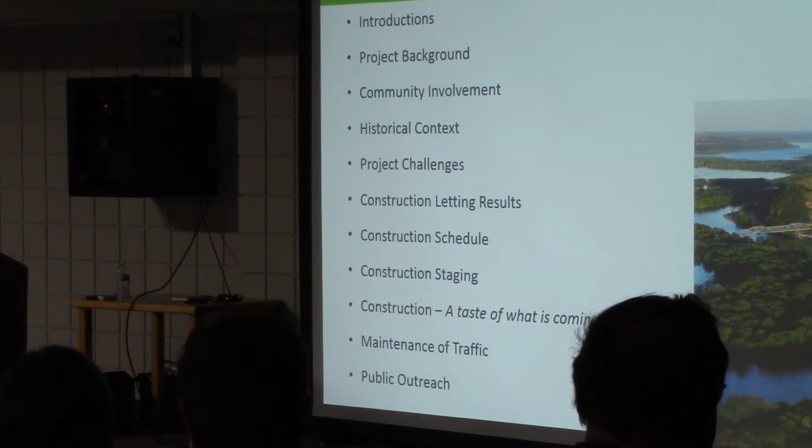Talk a little bit about public outreach. And so we'll start with introductions then.

My name is Terry Ward with MNDOT, the Minnesota Department of Transportation. On behalf of MNDOT District 6, I'm really appreciative of you taking time to come out and listen to what we have to say. There's been about 7 years plus of work on this project, and our challenge in the construction phase is to honor that work that's all been done.

A lot of you I recognize have attended some public meetings and you're here again, and we want to honor those commitments and those discussions and public input that we've gotten already. So my office, cell phone, and email, if you want to write that down, or it's on the boards, we have business cards, feel free to take that information. Basically for the project, in terms of the owner's side, I'm the first point of contact. Go ahead and call anytime if you have questions or something that's bothering you, or you want to know what's going on, or what's coming down the line, just go ahead and call me.

I'm also pleased to announce another speaker tonight from Zenith Tech, the construction manager, Adam Heinrichs from Zenith Tech. Adam is their construction manager, project manager. They're the winning contractor, and he's here tonight to give a little overview of their schedule, Zenith Tech and their team, and where they're from. So pleased to have Zenith Tech and excited to team up with them and build this project. Those are the speakers that we're going to have tonight.

Some other partners: the Federal Highway Administration. I don't believe there's anybody here from the FHWA - I don't see anybody, but they're a major player in our project with federal funding.

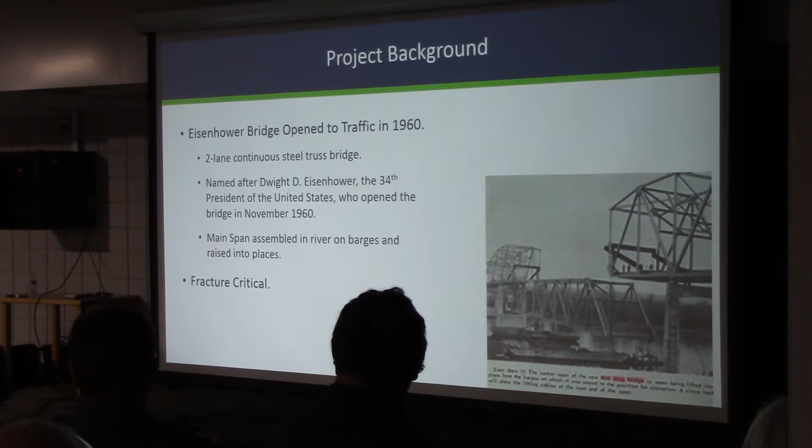We have some cool video footage of that event back in the 60s, of him being in town and opening the bridge. The main span was assembled at that time in the river on barges and raised into place. That's an old news clipping of the bridge being built—you can see the main span out in the river on barges, actually lifted up into place. Just some cool history. And that bridge is fracture critical.

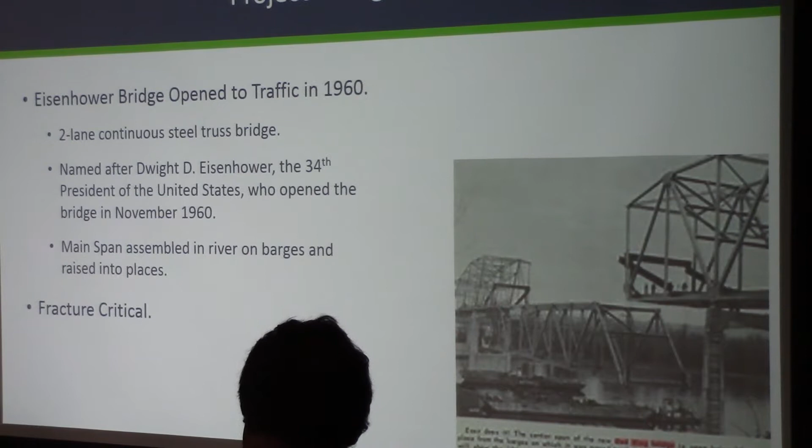What does that mean? Well, like the 35W bridge in the Twin Cities that collapsed, which was fracture critical, the existing Eisenhower Bridge is also fracture critical. One of the reasons we're doing this project is building a new bridge and actually removing that one. So just a little flavor of the history.

Purpose and need from the environmental study: basically, the primary need for this project is to provide a structurally sound crossing of the Mississippi River on Highway 63, and also to improve mobility in Red Wing in terms of traffic flow to the community. I'm not going to read the whole thing, but that's the primary purpose and need of the project, what we're trying to accomplish.

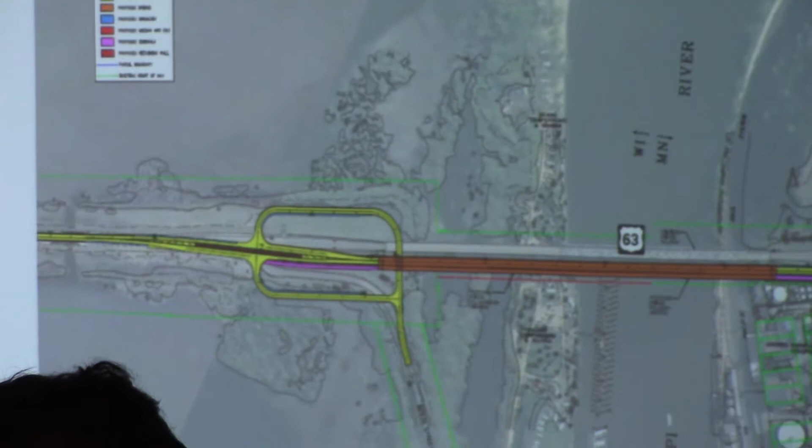So our project layout that a lot of people have been looking at—I'm just going to point out a couple things for discussion purposes. On the Wisconsin side, this intersection is what we call a jug handle. It's basically right turn movements in and right turn movements out with a solid median across there, so no left turn movements—exactly the same as what we built in Winona on the Winona Bridge project. Much safer because it removes those left turn movements in traffic. So if I talk about jug handle, I'm talking about this guy here.

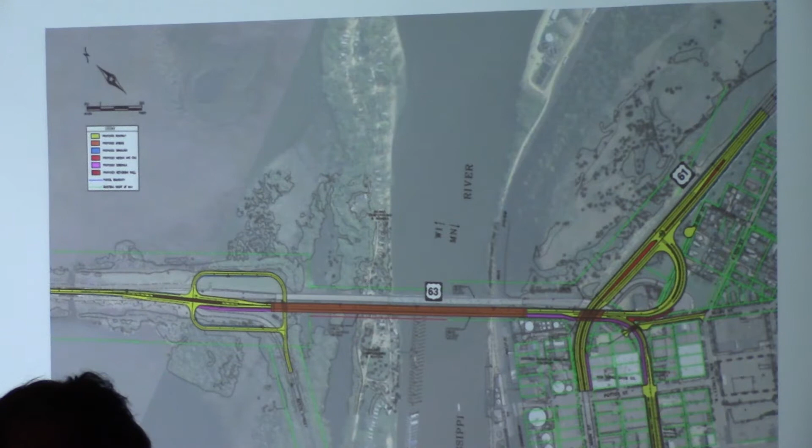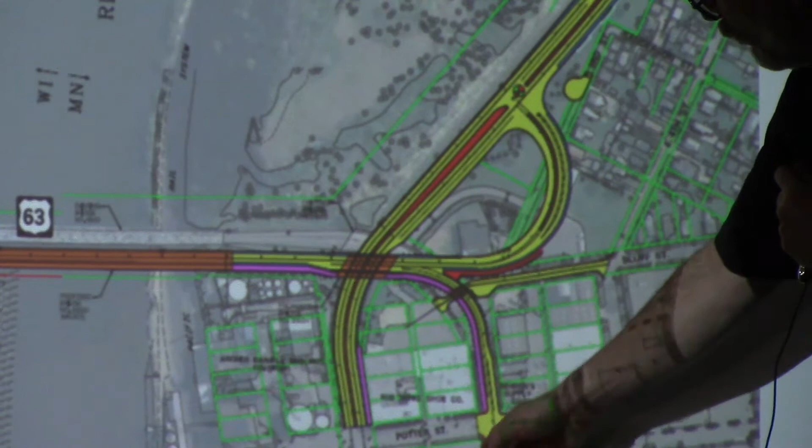Over on the Red Wing side, this is what we call a button hook. The existing slip ramp is two-directional today—you can go both directions to get up onto the existing bridge. When we're all said and done, this slip ramp is a one-way movement into town. It becomes two-directional down here between Plum and Potter, but this is a one-way movement into town.

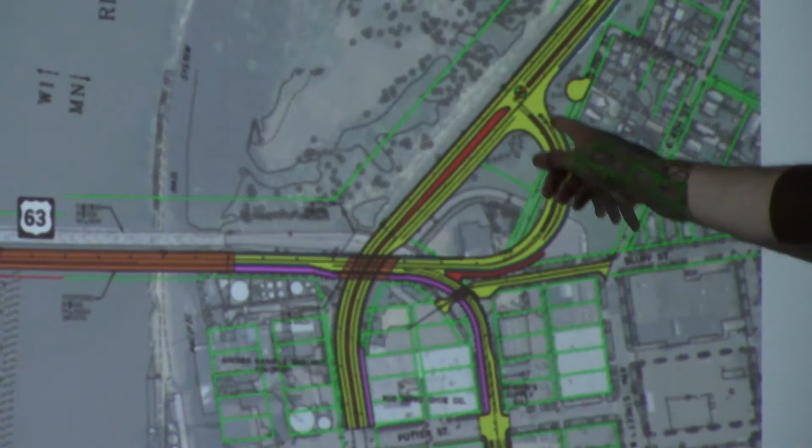Another option is to take this button hook to a new signalized intersection on 61. This piece is two-directional. So if you're in Red Wing proper and you want to go to Wisconsin, you've got to go out onto Highway 61 and go around the button hook and across. There's no longer that two-directional movement on the slip ramp—one direction in, and you have an option to take the button hook. Again, if you're in Red Wing and want to go to Wisconsin, you go through here, through a new signal, through the button hook, and out.

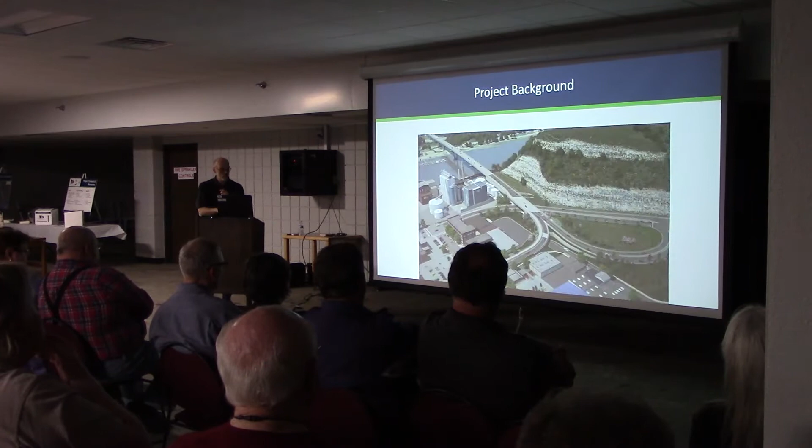Another rendering on the Red Wing side shows the button hook, the slip ramp, and the bridge over Highway 61 here. There's another bridge over that access, if you will, to the back side of Red Wing Shoes—that's another structure we'll be building.

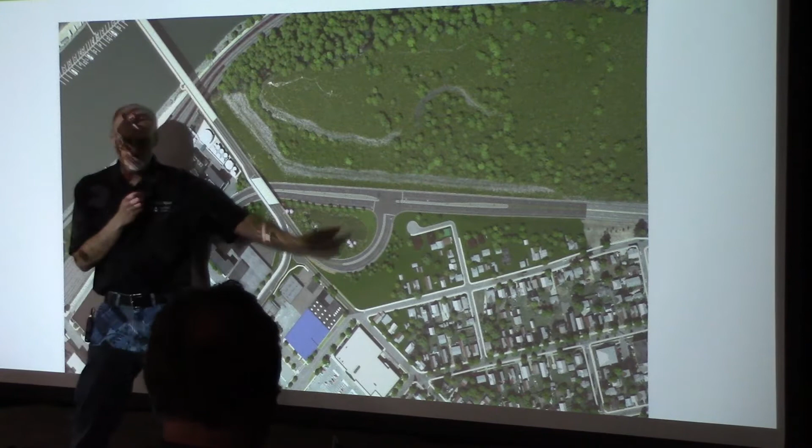And finally, one last aerial of that same area. I wanted to show this one just to give you a better feel for the cul-de-sac on 3rd Street, which we'll be cutting off as we build this button hook around. It gives you a better feel for some of the final conditions over there.

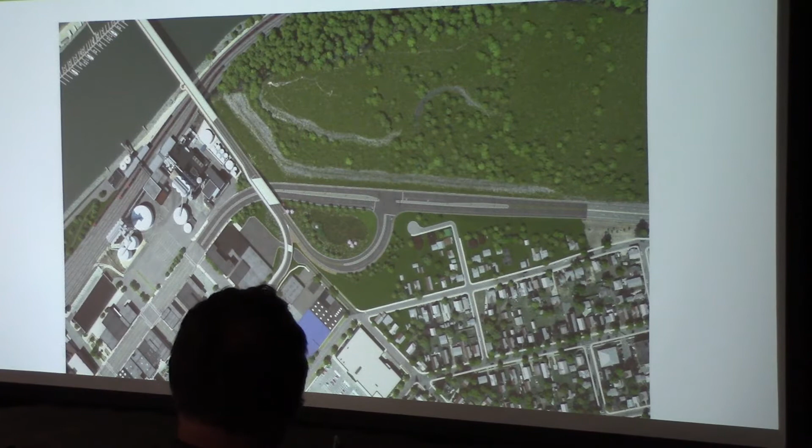Terry had a question: is the new bridge going to be a little bit longer, or are you going to fill in some of the swamp underneath the existing bridge? The question was whether the new bridge will be relatively the same as the existing one, and whether we'd fill in some wetland areas to shorten it or drive under there. No, we're not going to do that. So the new bridge will be relatively the same length as the existing bridge.

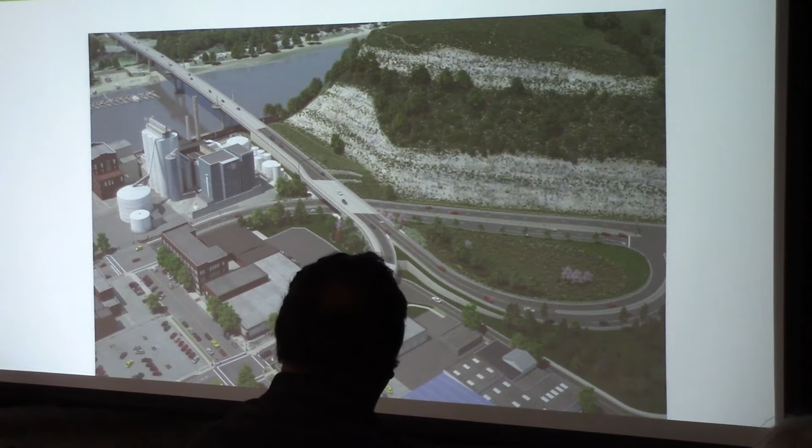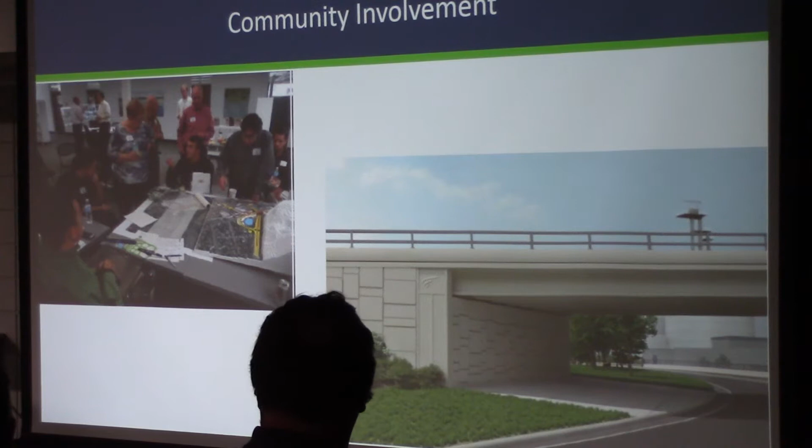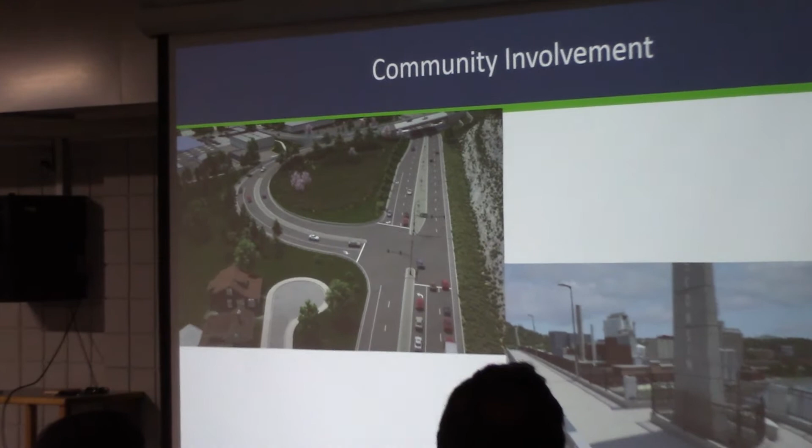What I wanted to show on the bottom right is some little signs of Red Wing in the abutment, the detailing on the abutment wall, the wing wall. In the button hook area, there's some landscaping and planters. And on the bridge itself, we have two overlooks and spires with Minnesota and Wisconsin on them, along with some ornamental railing. So you'll start to see those elements.

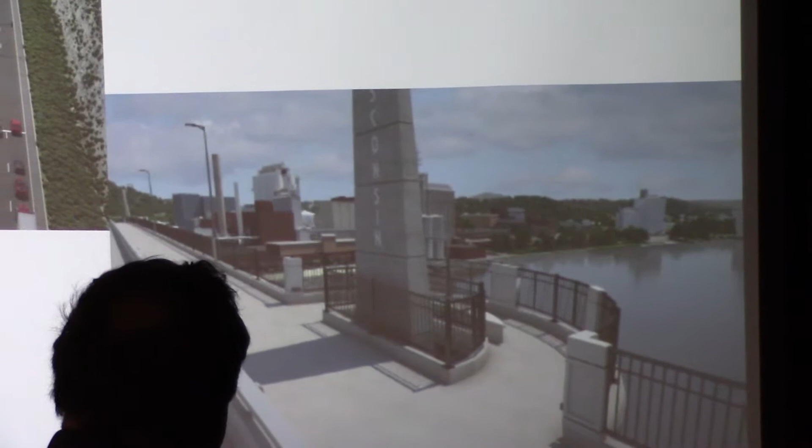A little bit of historical context then. In terms of the setting, we're in a downtown historic district, with specific historic buildings in proximity to our project and construction operations. Barn Bluff is a historic element, and we're well aware of that. The Trunk Highway 63 bridge over 61 is also a historic bridge, a smaller one. So for these historical properties, we're going to have a vibration monitoring plan for all those historical features.

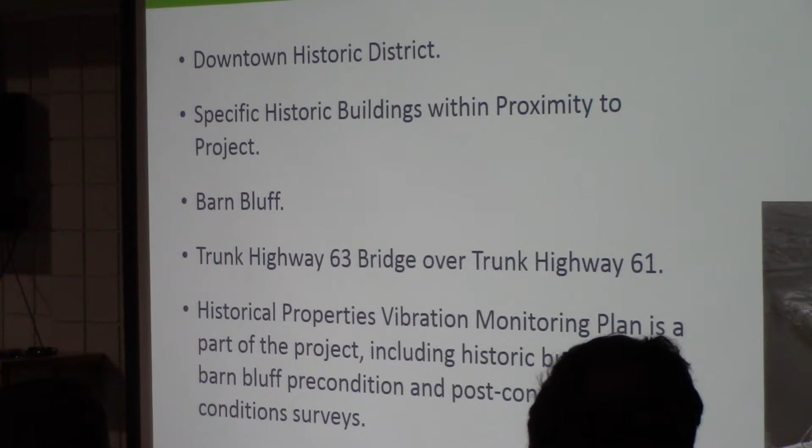We monitor how much vibration the construction activities are creating, with a mindset of protecting those historic resources. We've studied Barn Bluff quite in depth, and we actually have specific vibration limits for any work in its proximity, so that we don't do any undue harm or damage to it, as an example of the work we've done and intend to do.

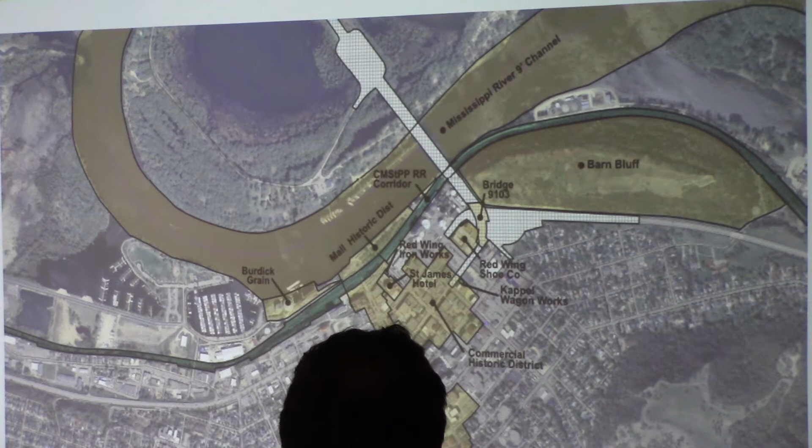So regarding historical context, we're well aware of the community and the views of Barn Bluff. This slide shows the historical buildings and the historical district, and it shows Barn Bluff. Actually, the river channel itself is historic, and the CP Railroad is historic as well - there are some historical aspects to those. So there is quite a history of historic elements and historic properties.

Okay, let's talk about some project challenges then, moving on to another phase here. This is a major, complex infrastructure project, no doubt about it - it's a challenging project to build. Zenith Tech has come to town with a lot of equipment, manpower and horsepower to build this project, and we're excited to be a part of it with them. It's a very narrow project corridor - we're squeezing in between ADM, our friends in back who are here, and Barn Bluff and the existing bridge. That's a real tight, narrow corridor for us to work in.

The peak AM and PM commuting hours across the river are a challenge, and I'll talk a little about maintenance of traffic and how we're going to respond to that. We understand there's a morning peak hour and an afternoon peak hour commute across that river during the week for workers. There are also construction and post-construction traffic pattern changes - I talked about the button hook and the slip ramp and some new traffic changes there, so we're going to try and feature those in our public outreach. We're also working in close proximity to some businesses.

Has the Prairie Island tribe had any input in the planning process?

The question was whether the Prairie Island tribe has had input in the planning process. We've met with them, worked with them, and will continue to talk and work with them for this project. We've reached out to them regarding a groundbreaking that may occur here, and we'll continue to work with them on the project.

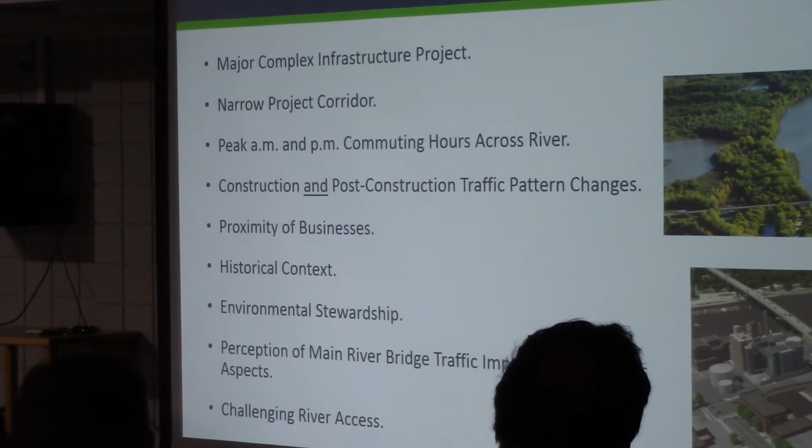Within 660 feet, we can clear trees, but we have to have somebody watching the nest at all times while we're clearing. Fish and Wildlife doesn't want the eagles leaving the eggs for over 2 hours. If the eagles fly away while we're working, we have to stop until they return if they're gone more than 2 hours. We can work within 660 feet though. We have a permit for the tree removal, which we've done, and we're getting a permit for the rest of the job and all other operations — I suspect it'll have those same requirements, and we'll follow them.

Let's talk about the perception of the Main River Bridge traffic impacts and business aspects. In my recent career I've been fortunate — I started working in Dresbach on the bridges there, moved up to Winona where I'm still working on the project, and now up to Red Wing. It's been a great journey for me.

In Winona, one issue was that people on the Wisconsin side thought the project would impact them so much it wasn't worth their time to come shop in Winona. So we had to fight the perception that Winona was open for business and easy to get to. We deployed some techniques there, but that same perception could arise here for the business community in Red Wing — that this major complex project will disrupt their commute to shop in Red Wing. We were mindful of that, and we have techniques that could work here too.

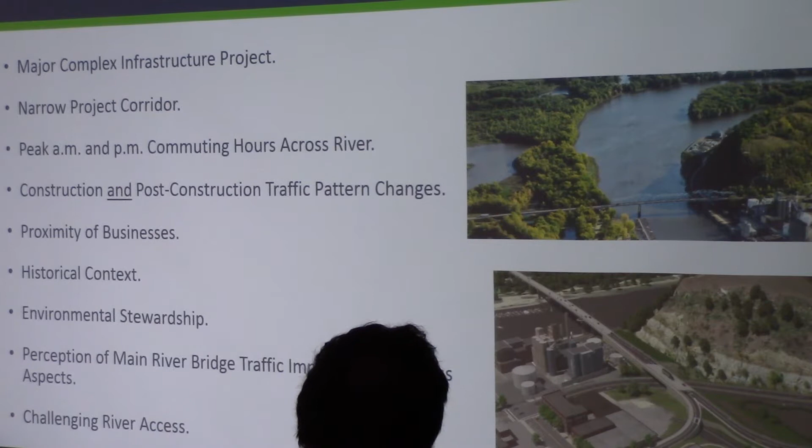There's also the challenge of river access. On the Red Wing side, that tight corridor with the cut to the bluff and the railroad makes it real tough to get to the river. That's just another challenge we have to work with.

Let's talk a little about construction letting results. The letting date was March 8th. We had four bidders — four contracting teams that submitted bids. Zenith Tech, Adam and his company, were the low bidder at $63.4 million. We'd like to give you a bit of background on the Zenith Tech team.

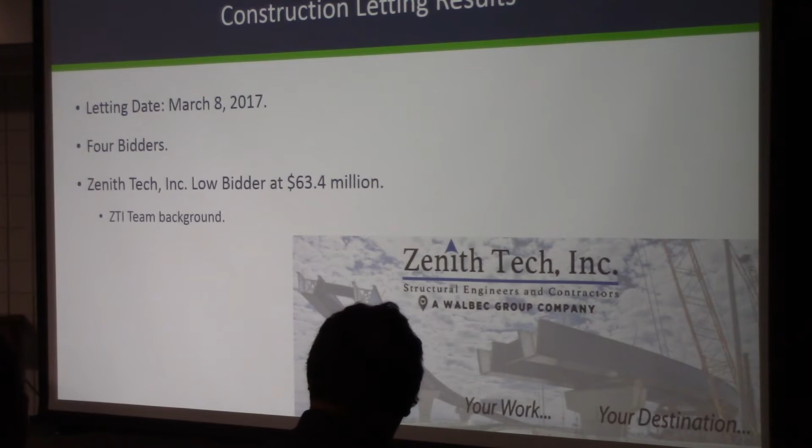I'll start with some company background. We're Zenith Tech, a Walbec Group company. We've been around for over 85 years as a group of companies in the heavy and highway industry, with backgrounds in every aspect of roadway and bridge construction. We're new to MnDOT, so a lot of people may not be familiar with us — we've been bidding projects in Minnesota for about two years. We're working over at Grand Forks and up in the cities, and we're really excited for this opportunity to come down here with our team.

So we're bringing our construction team, foremen, superintendents who have 30-plus years of experience building bridges very similar to these structures. We have a big background building very tight urban interchanges, so we felt this fit our core competency, and we put together a good game plan. We have over 20 subcontractors that will be working with us to complete the other aspects of the work out here, and we're very excited for this opportunity to be working with

MNDOT. Question for Adam? Yeah, thank you.

Okay, let's talk a little bit about construction schedule then. The contract start date — I've had a number of questions. Hey, is Friday the start of construction? Well, not necessarily. The contract start date, when the clock starts ticking on the contract time, is Friday. Adam will talk about their operations and schedule in a little bit. Contract completion date, when all work is to be completed, is August 20th of 2020. That's building the new bridge, all the roadways, everything I've shown you, plus removing the existing bridge.

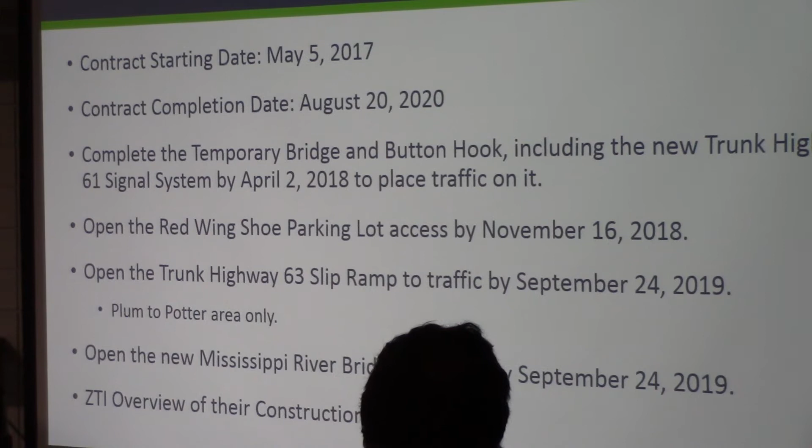Okay, Adam, if you'd like to give a little overview of your schedule. Yeah, Terry gave a great overview of the overall dates in the contract, but I think I'll primarily focus on our work for this year so everyone knows what it will look like. As he said, the contract starts May 5th.

We're still working to get a lot of the environmental permitting in place, vibration monitoring plans in place so that we can protect all of the elements around here correctly. That being said, we're looking to move in on the Wisconsin side and start on the north side of the new river crossing yet this month. So in the next couple of weeks, you'll see activity on that side. We'll clear the trees out, start building our temporary access to actually construct the bridge elements down below, and we'll start working on new fills, because the new fills on that side have settlement periods before we put traffic on them of up to 12 months. So we want to make sure we get on those early and get those in place. That'll primarily be what you see for the next couple months.

We are working to get our vibration monitoring in place on the Minnesota side, which will probably take us to around July before you see any major activity on that side. For the time being, you'll see some utility relocations that are ongoing over there, but in July you'll see some of the old buildings that need to come down starting to be demolished. We'll move in down by ADM and start preparing the area for constructing the new pier that goes along the existing pier down next to the rail yard.

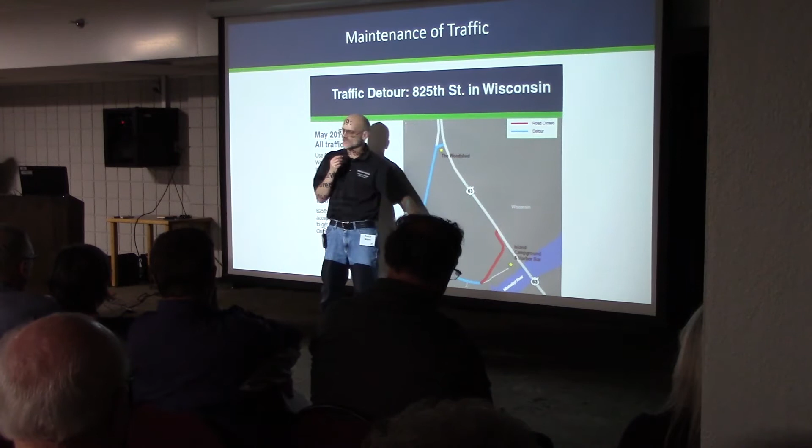Let me go a little ahead and I'll come back. So we're talking about the rerouting, detour if you will, of this 825th Street traffic around this direction. MNDOT guidelines, which is similar to WisDOT, say this is not trunk highway traffic, it's a local traffic movement. We're not detouring Highway 63, so we're not required by statute to take over this road as a formal detour and be responsible for restoring that road at the end of the project.

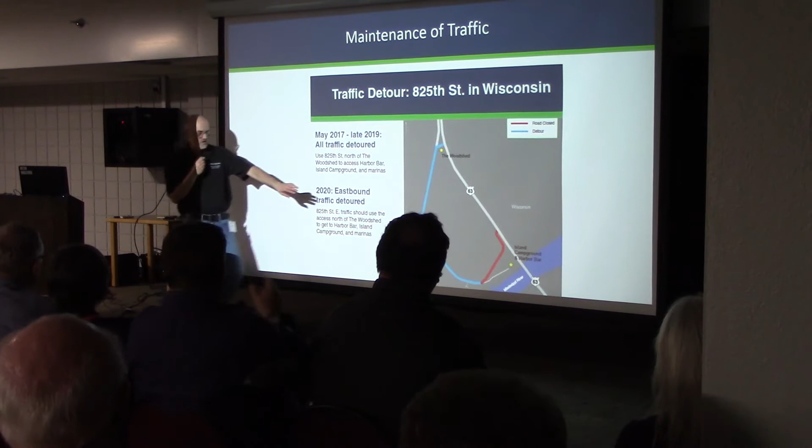So to answer your question, is there money within the project, either from the state of Minnesota or the state of Wisconsin, to pay for any road damage? No, it's not allowed by statute because it's not detour or trunk highway detour traffic, it's local traffic. So again, we won't be taking that over and bringing it into the trunk highway system, and we won't be responsible for any impacts unless the Zenith team declares this as a haul road. Meaning if they want to haul aggregate, base materials, and loads across there, then we get into a haul road situation, which is different. There could potentially be some dollars from either the contractor or the state for haul road maintenance, but only if they declare it and use it as a haul road.

Question: What happens to your project if the road owner sees destruction of the road and puts a very tight weight limit on it? That's up to the road owner.

If the road owner decides to put a weight limit on there, close the road, whatever, that's up to the road owner, not the Department of Transportation or Zenith Tech. Thank you.

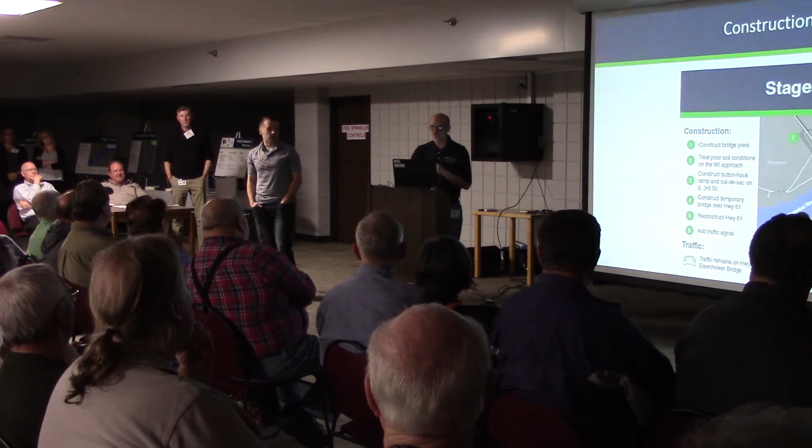The question was about pile driving. The piling that we're going to drive on the project are over here, what we call Piers 3, 4, 5, and 6 and the north abutment. The main river pier, what we call Pier 1, the south abutment, and these other bridges, we're not going to drive piling there - we'll have different foundations. So the pile driving is over in this area, those piers and the north abutment.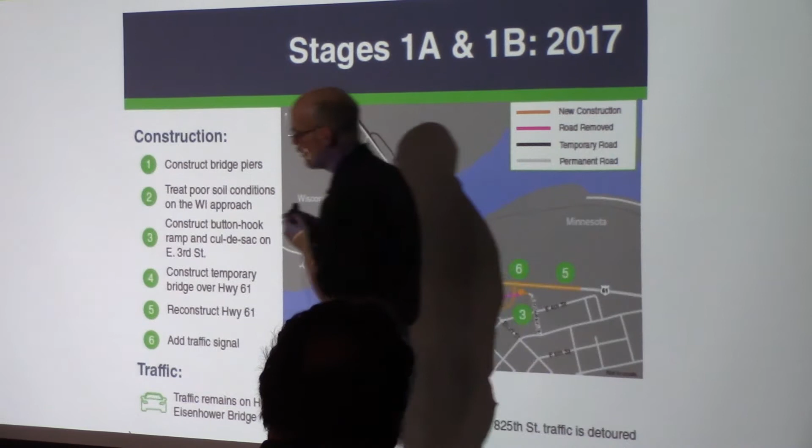We have a couple of specific restrictions. One is noise limits, and two is specific timelines when the Zenith team cannot drive piling and create that noise. That starts Friday afternoons and goes through the weekend, when the businesses, primarily the campground, are open - that season when the campground is open. So Adam talked about coming in, potentially driving some piling. There are time limits in terms of noise creation - can't start before 7, can't go into late evening. You can't do that pile driving operation during those weekend hours.

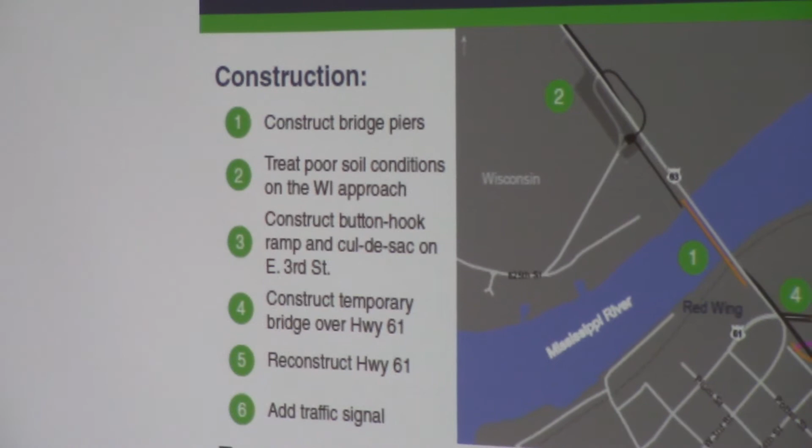All right, thanks Tom. So we'll look at some of the stages from the boards over there. 2017, stage 1A and 1B: number 1 is constructing the main river bridge piers, number 2 is some poor soil conditions on the Wisconsin side - we have to surcharge it, build a big fill, and let that set for roughly a year, so it's going to take approximately a year to build that fill and approximately a year to settle. We also construct a button hook, a temporary bridge over 61, reconstruct a portion of Highway 61, and add a traffic signal. That's stage 1, what we call 1A and 1B, in 2017.

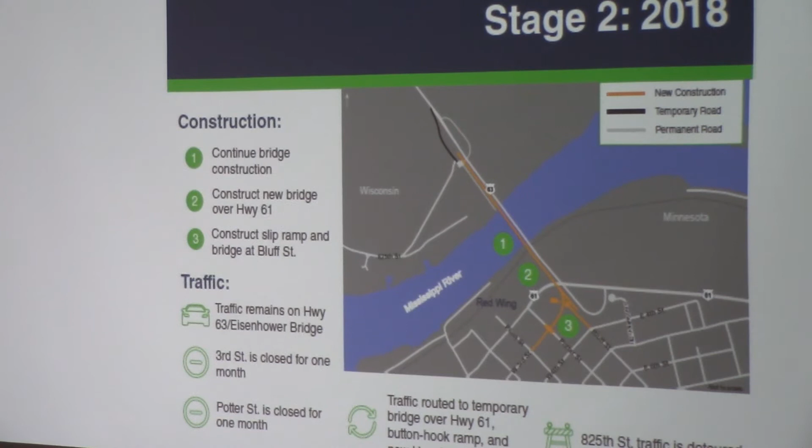Stage 2 in 2018: continue the bridge construction on the main river bridge, construct the new bridge over 61 while traffic is on the temporary bridge, and construct a ramp and slip ramp and bridge at Bluff Street - that's the bridge that serves the back side of Red Wing Shoes. The big addition there is the slip ramp construction slated for 2018.

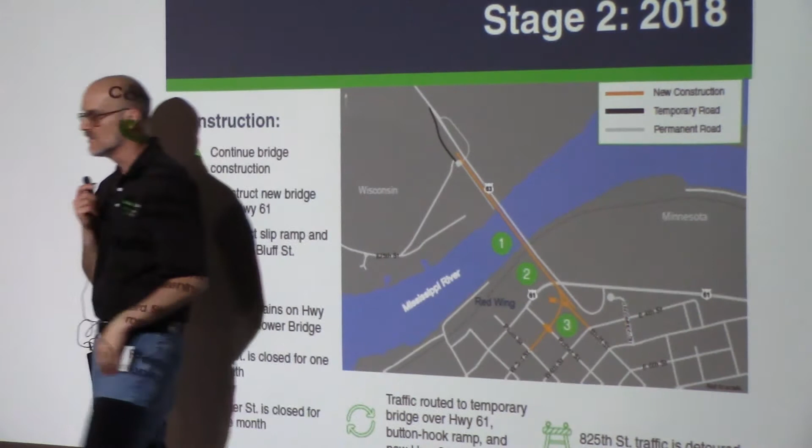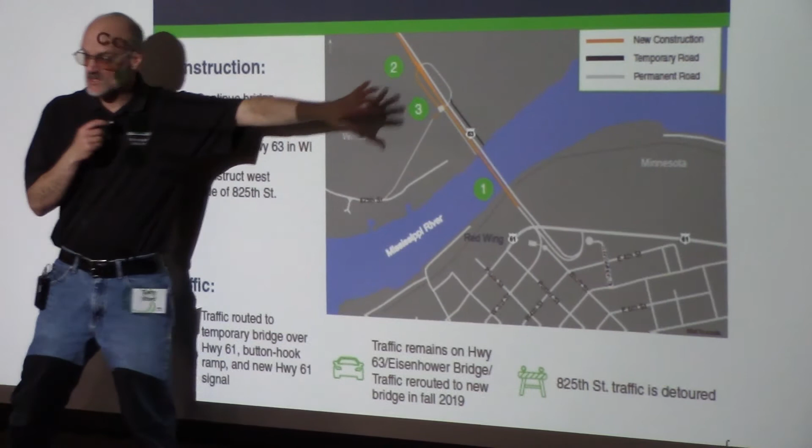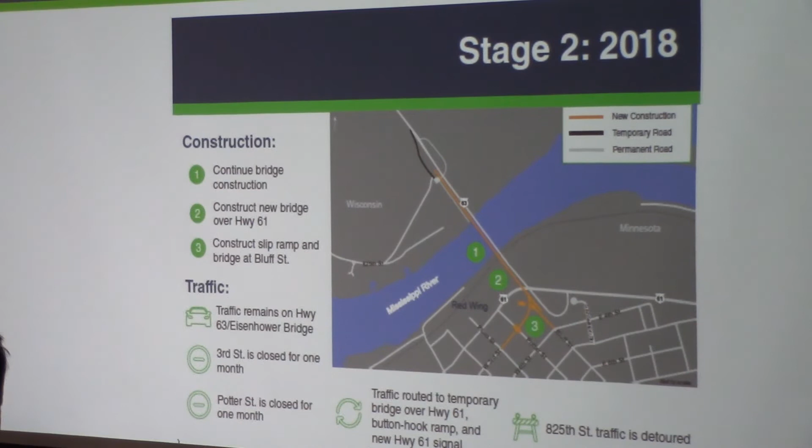Yes? Okay, you're going to fill all that in on the other side of Wisconsin, correct? Where's all that fill coming from? They're going to be going through town, coming to Wisconsin - we're going to have a bottleneck right there with trucks moving in and out, or what do we have going on down there?

The question, and Adam correct me if I'm wrong, is about the fill - it's roughly a 20-foot tall surcharge of fill. Right now, from what I've seen, most sources of material are from Wisconsin. Correct. So the source of that material is over on the Wisconsin side, at least as of today. Does that answer your question? Yeah, okay.

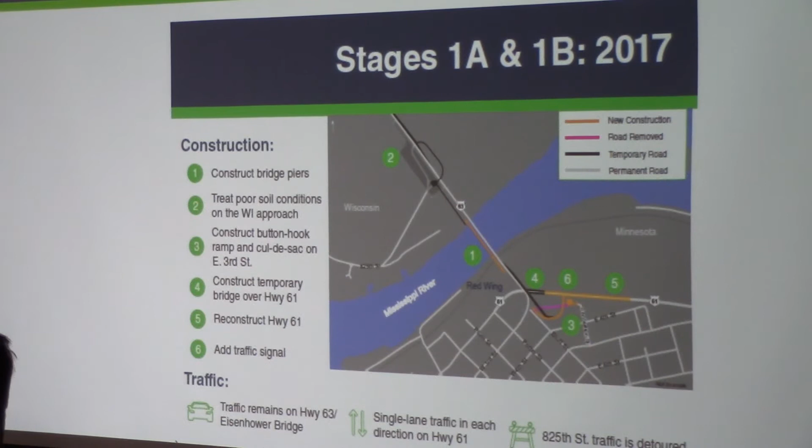Does it pretty much end after your turnoffs there on the Wisconsin side? You don't do much between there and up to the Mud Lake Bridge? Yeah, the question was, on the Wisconsin side, where does the construction end?

There's a box culvert at Mud Lake. We're actually extending past that box culvert just a little ways. We're gonna replace that box culvert, build a little bypass on the east side, and extend past the intersection, past Mud Lake and that box culvert. There's some guardrail there where that box culvert is. We're gonna put a new box culvert in that same location and then tie back into the highway shortly after that.

Could you go back to stage 4? That one? One more, stage 3. So during this time, we'll be able to cross on 63, take the button hook up to get in. Now, when you begin to switch things over onto the new highway, you're going to repair the 61 underneath the bridge. How are we going to get onto the bridge to go back to Wisconsin?

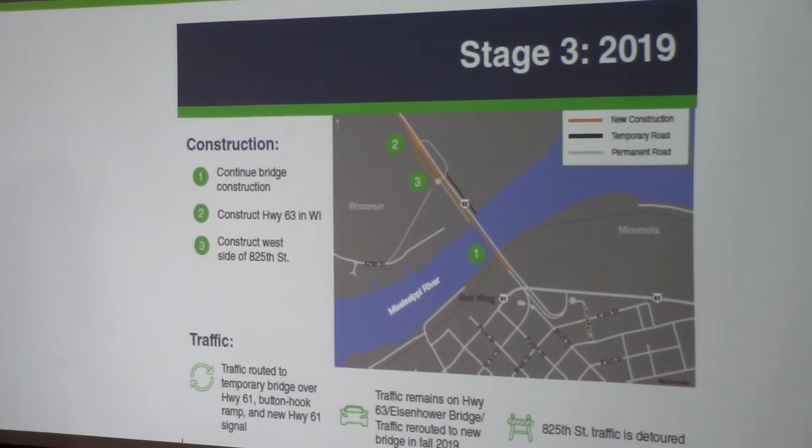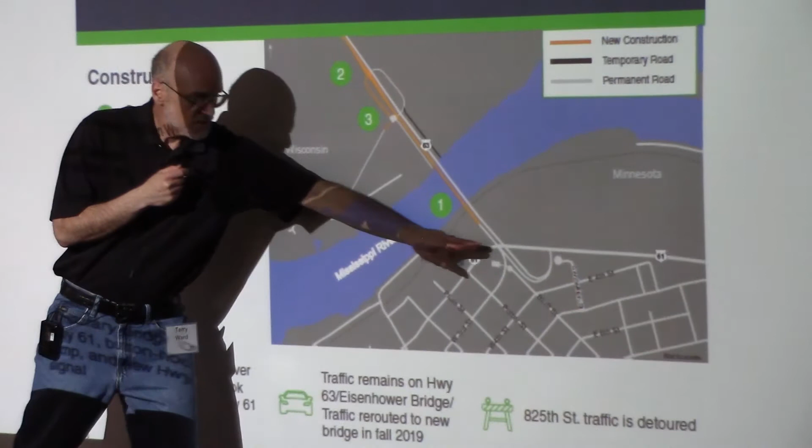So yeah, in stage 3 we're still working on the new bridge construction. We're constructing the highway on the west side. We've still got this button hook temporary bridge situation, okay? So then I think you're on the right track. And if we go to this one right here, so you're going to be repairing 61.

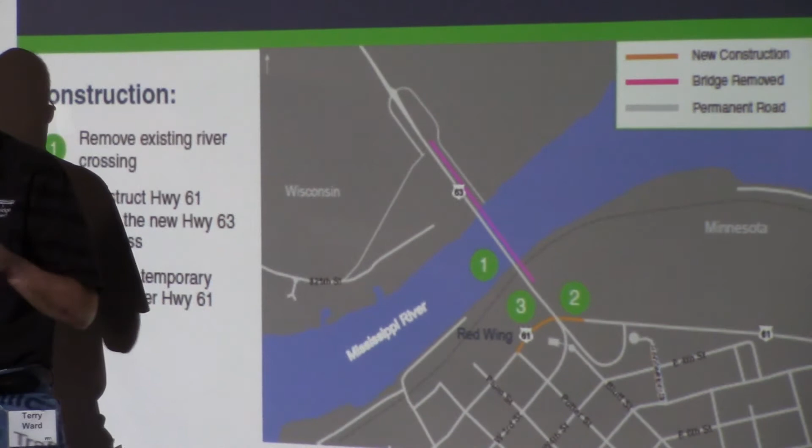So let's say that I'm wanting to go from Red Wing back to Wisconsin. How would I get there with 61 being out of commission? 61 is open, or will be, while you're building? Yeah, while we're building, the whole time we're never closing Highway 61. We'll be moving traffic back and forth because we've got multiple lanes, one lane each direction, never closing 61. It'd be similar to what we did with the Main Street project where it's 4 lane, but there'll be 2 lane, 1 lane in each direction at all times. So that's a good question, because we're gonna be working right there and it's gonna flop traffic as you're building different parts of it.

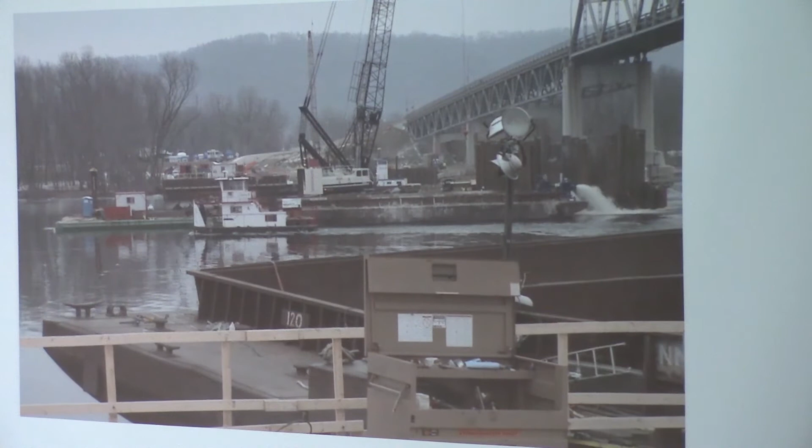Okay, I wanted to give you a little taste of what's coming, we'll see if these work. So this is a video from the Winona Bridge project, and if you look at it, they're dewatering a cofferdam out in the river, trying to get a dry location to work. So they drove some sheeting, placed a seal, sealed it up, and now they're trying to dewater that so they can get down and work about 20 feet down from the river elevation.

Zenith may not have as many barges on site because they may build a temporary trestle. But if they do, it just gives you an idea for a marine type operation and then dewatering. So that's that one.

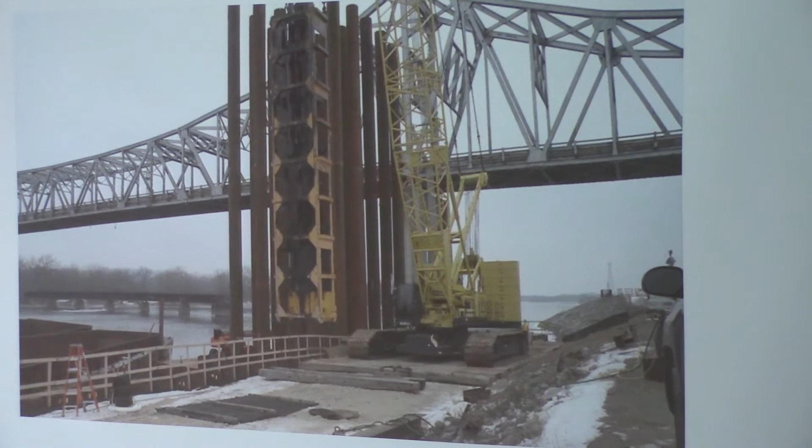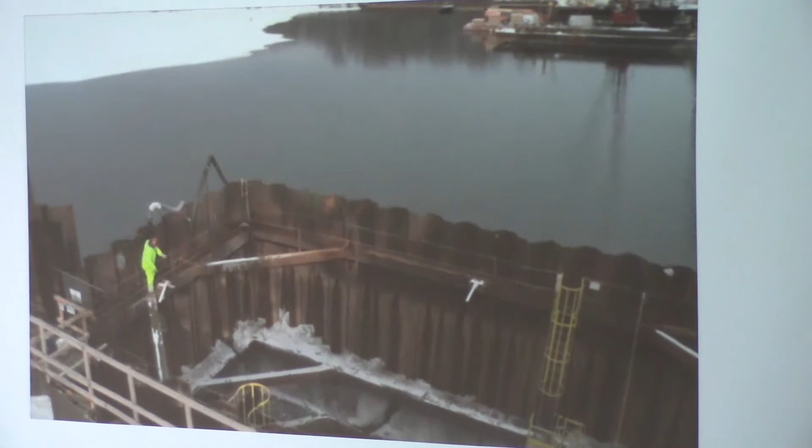Let's try this one. This is a video of actually going down in a cofferdam for a large pier. And we'll have cofferdams on this project. So it's a big steel sheeting box, if you will, with some ring beams, support beams. And we're going down inside of it to the bottom of the river where we've dewatered it. It's not completely dry, there's still water that seeps in. You'll see the icicles and such, but now we're getting down in the bottom, working roughly 20 feet down from the actual elevation of the river.

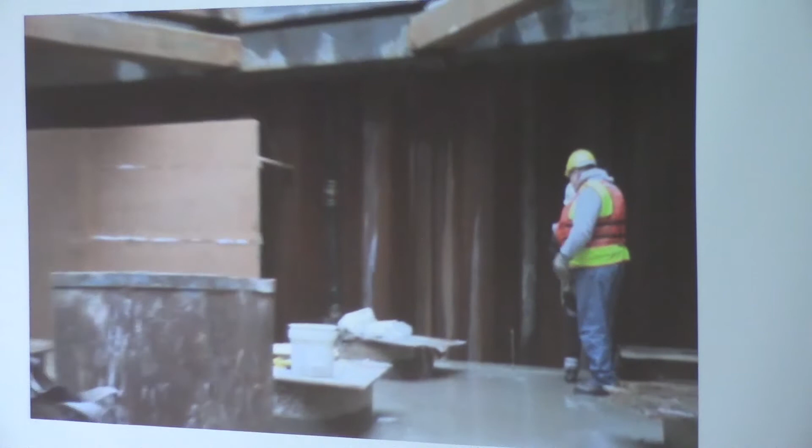Got some carpenters, they're building the forms to hold the concrete that we're gonna pour to build that foundation or footing. We've got a big, thick concrete seal that keeps the pressure of the river from coming up. And they're working down there, and there's some water that keeps running in, icicles, but very similar to what we'll do on this project.

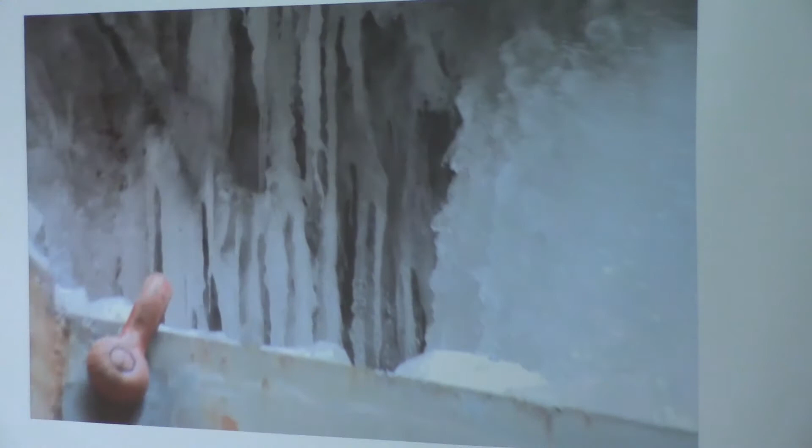Yes sir. So you drive piling to make your cofferdam, do you drive piling in the middle too, to hold your concrete up? Is there, that's temporary on the outside, I understand. Yeah, drive sheeting. Excavate, drive piling, excavate out, pour concrete to seal it up. But is there anything below the concrete?

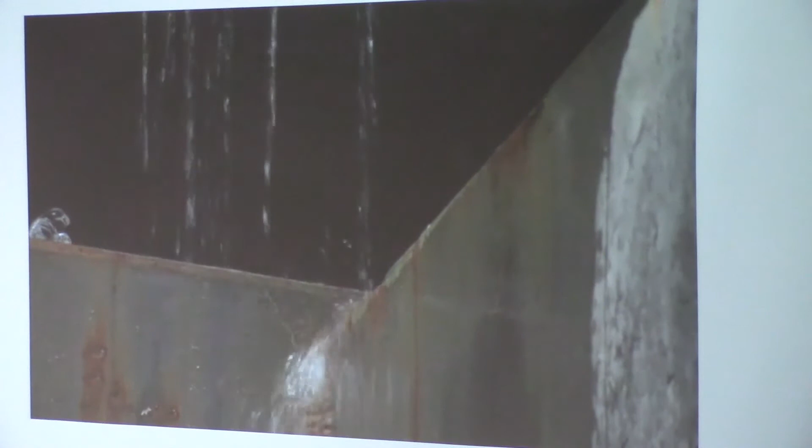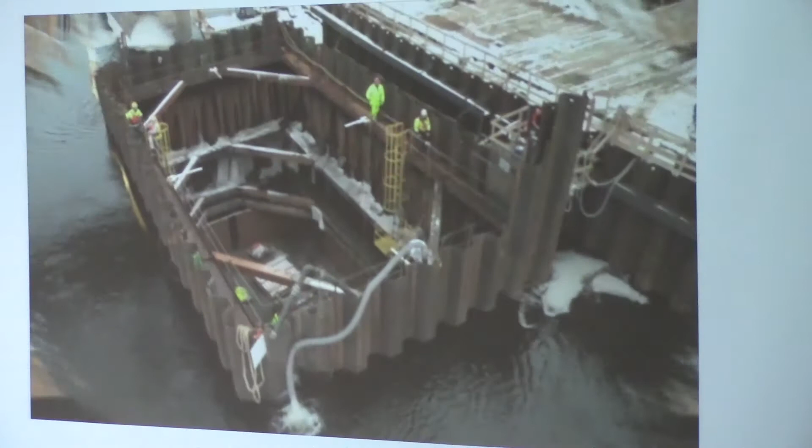Not below our seal. So to make it clear, we have a concrete footing, which is part of the permanent structure, and then we have a thick concrete seal whose only purpose is to hold that hydrostatic pressure of the river. But we excavate down below the bottom of the river channel for the thickness of that footing and seal. There's nothing below that except the piling that goes down. The piling are set up to go down to what I'll call bedrock, which is quite a ways down. Does that help you?

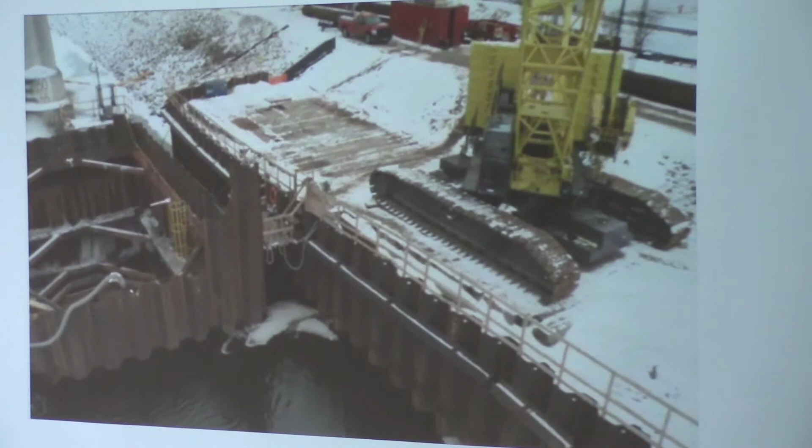Let me explain the type of drilled shafts used on the main piers. Pier 1 is on the bank by the railroad tracks. Pier 2, out in the middle of the river, we're going to do drilled shafts - 9 and 10-foot diameter drilled shafts that a big auger drills down. Then we fill them with concrete and rebar and come up out of the river bottom. So we're not driving piling on those, we're using these drilled auger shafts.

Question from over here: when you go down to the bottom of the river in those locations, what about any historical artifacts down there? Our team is tasked with, if we find artifacts we think are historical anywhere on the project, we have a network of people, historians, who will come help us. That's our job, to be mindful of that. If we find anything that looks suspicious, we have to contact them. I had a grading job years ago where someone came up to me with Indian arrowheads, and right away I called the historical people. That's very serious stuff.

Question from the back: do you have an estimated depth to bedrock? Roughly 100 feet. The water depth, the deepest from the contours I've seen, is out around that main river pier, about 20 feet deep. We have to go down about another 10 feet to excavate to get our footing and seal, then down roughly another 70 feet, give or take. It varies, there's contours in that rock elevation as the channel has been cut out.

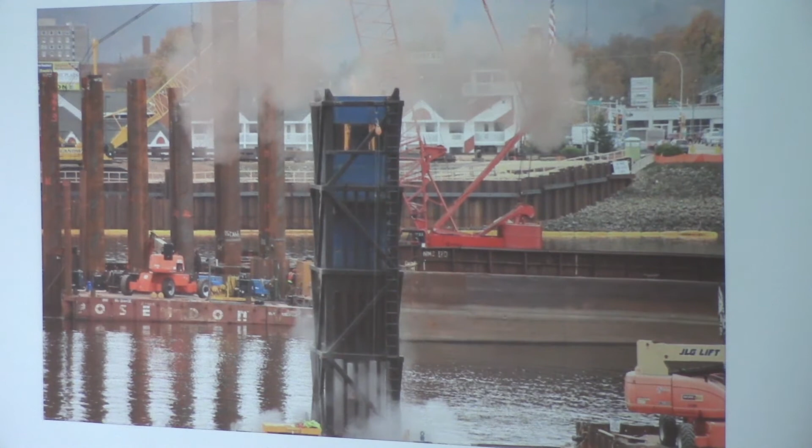Okay, let's try another one. This is a statnamic test. We're not going to do this test on the Red Wing project, but we did it in Winona. That test measures the structural strength of the piling that we drove. So watch this. That's pretty cool - the point is you get to see some really cool stuff, and we'll do our best to let you know what's coming, try to get video and post it on our Facebook page.

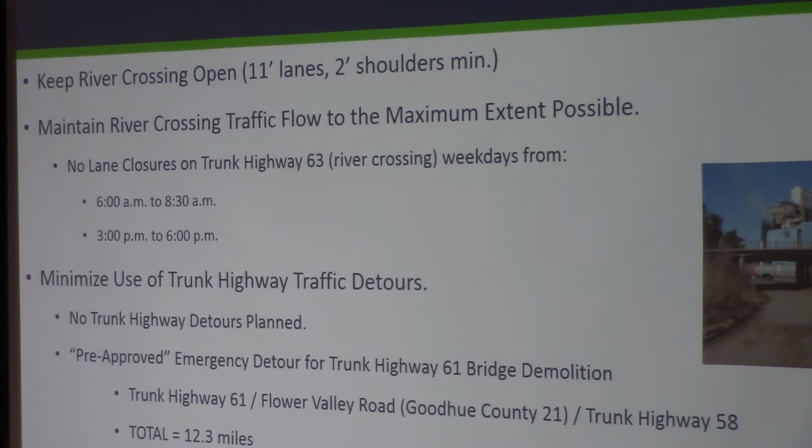Okay, let's switch gears to maintenance of traffic - had a lot of questions about traffic over there. We're committed to keeping the river crossing open with a minimum of 11-foot lanes and 2-foot shoulders at all times. We are not planning to close the river bridge. I can't say we may not have an incident - a truck could make a move and we lose a load on the bridge. There's nothing we can do about that. We may have to reroute traffic, but we're not planning on it. If there's an emergency, we'll deal with it. Maintain the river crossing traffic flow to the maximum extent possible.

So what does that mean? No lane closures on Trunk Highway 63 weekdays, 6 a.m. to 8:30 a.m., 3 to 6 p.m. So one direction movement, one lane each direction during those hours, with no flagging operations, no lane closures, no disruptions.

Outside of those hours, someone asked about all the material coming in - where's it coming from, the trucking, how are you going to do all that? I suspect there's going to be some flagging operations. People are going to see flaggers out there slowing and stopping traffic so we can get trucks safely in and out of the work area. That's coming - we're going to do that outside of those hours a lot.

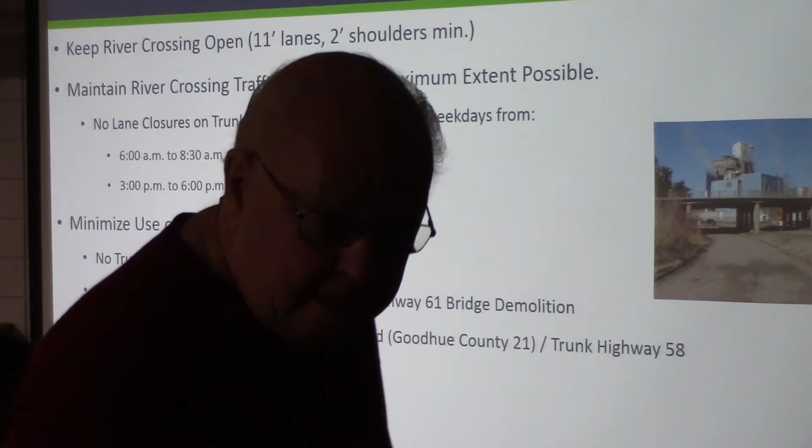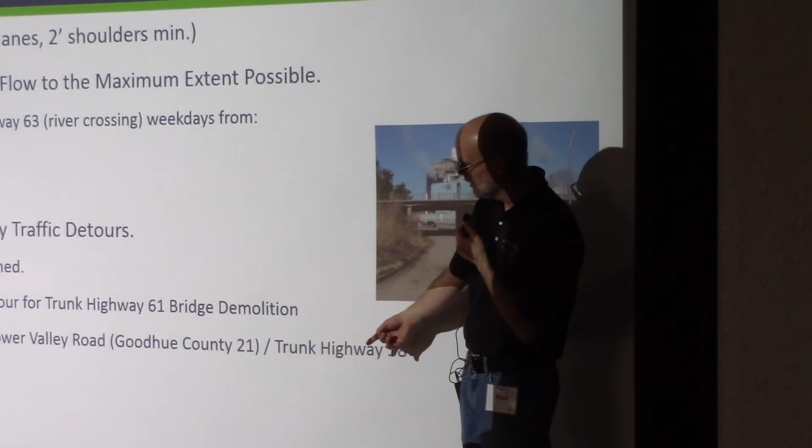Minimize the use of trunk highway detours. I talked earlier about trunk highway detours - we have none planned on the project. The local detour on 825th I talked about with planning. We do have a pre-approved trunk highway detour for the Highway 61 bridge demolition, a slab span bridge over Highway 61. When we remove this, if something falls or gets away from us, which could happen, we have a pre-approved detour for an emergency situation: Highway 61, Flower Valley Road, Goodhue County 21, Trunk Highway 58, about 12.3 miles. We've got a plan for that and can kick it in service real quick. That's the only trunk highway detour we're even thinking about at this point.

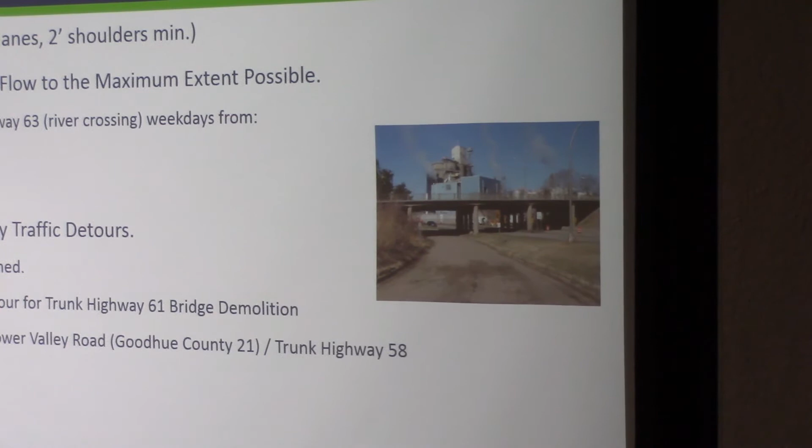Minimum duration of the temporary bridge use - we talked about not using it this winter, even though we're going to build it this year. We could put traffic on it this winter, but we're not planning to do that. It has 12-foot lanes, 4-foot shoulders, and a 15.6 vertical clearance. That 15.6 is what we'll give our over-dimensional permit staff in terms of what can go underneath it.

Minimize the duration of that slip ramp construction. The stage 4 you asked about, where we're building that, is actually the second stage in '18. Because that movement's closed, we wanted to minimize the timeline, so we're committed to doing that in one construction season.

Install a new traffic signal on Highway 61 prior to the button hook traffic. We have to have that new signal out on 61 before we put traffic on that button hook, because that's a brand new intersection. We don't want button hook traffic coming together with live traffic on 61 without a signal system. So that's a requirement.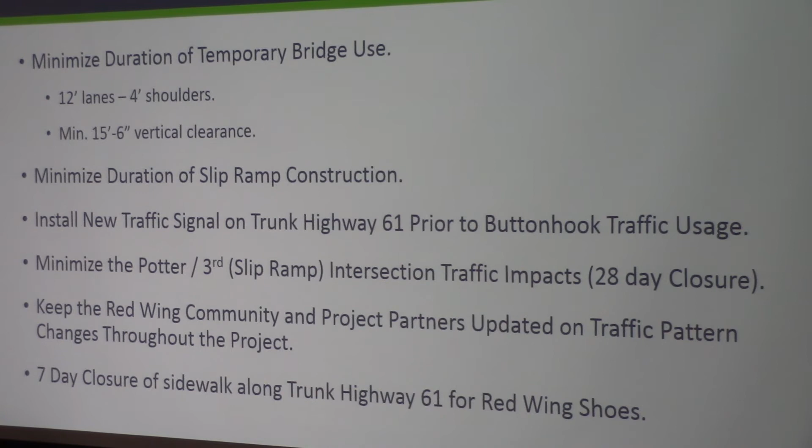Minimize the Potter and 3rd Street slip ramp intersection impacts. Let me back up and go through some of the things I'm talking about. So again: button hook, new signal, minimize the time of this construction to one construction season because of the impacts of that.

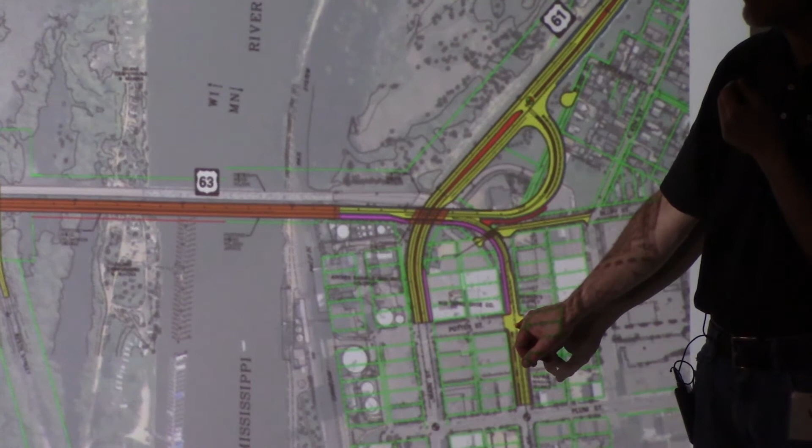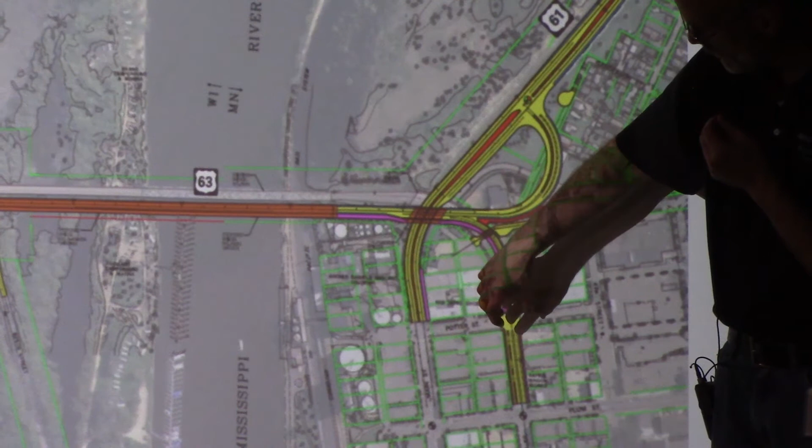When we're talking about 3rd and Potter, when we're doing this work, this crossing is kept open at all times except for 28 days. Adam and the Zenith team have basically a month-long shutdown where this intersection will be closed with no crossing, to do the utility work in there. Otherwise, when we're doing all this work, this crossing will be kept open, except for that 28-day window of time we've committed to.

Any questions on that? All right.

A couple more things. Keep the Red Wing community and project partners updated on traffic pattern changes throughout the project. There's a 7-day closure of the sidewalk along Highway 61 at Red Wing Shoes. We have to rebuild that sidewalk, and the Zenith Tech team has 7 days to do that work. And we've talked about the detour for 825th in Wisconsin.

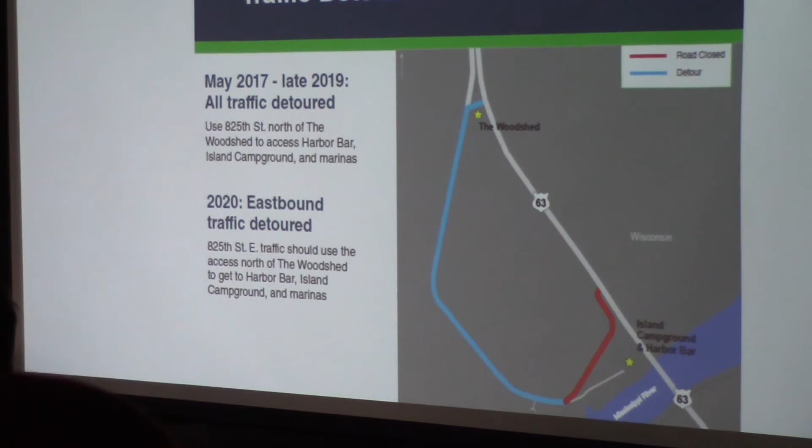Public outreach: construction start is again early May possible, though Adam says more like mid-May, weather permitting, for the actual start of construction. We've hired a public relations consultant to assist our team with outreach - a group of consultants with public relations expertise to help us engage the community on any questions or information. Feel free to utilize those services.

Extensive outreach is necessary for project success. We understand that as a project team - it's part of our job. We're in this with the community together. It's our project - not just a MnDOT or Zenith Tech or WisDOT or city project or an FHWA project. It's our project. We have a project Facebook page.

How many of you have looked at our Facebook page? I'm surprised at the number of people in the comments - that's great. We're committed to keep putting fresh stuff up on Facebook to keep things interesting. If you have topics or stories you'd like us to tell, shoot us a note or give us a call, and we'll do our best to accommodate.

The tree removal contract and work has started. We had a tree removal contract on the Minnesota side where we hired a contractor to take the trees down - that work is done. On the Wisconsin side, WisDOT and Pierce County are working on removal of the trees over there.

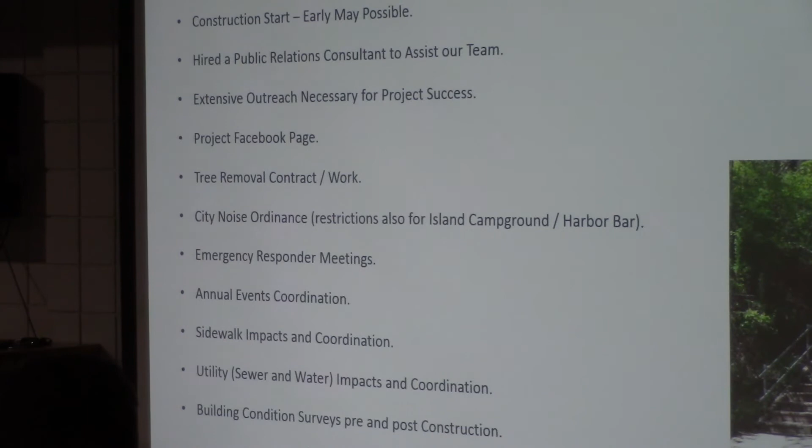So if you get a letter in the mail from MNDOT or from Zenith Tech, please open it, please read it, because we're probably asking, hey, can we partner with you and have somebody come in and do a building condition survey?

Questions? The question was, if I heard it right, how and where are we going to get rid of the riprap from the Eisenhower Bridge? So the riprap, the bank along the levee on the Red Wing side has riprap along the levee protection.

We have to remove that, and we'll actually be replacing it. You'll see riprap from the Zenith team as they bring a causeway to the river - they're going to put riprap for protection. We'll be putting riprap in the river to actually help get out in the river to work. So Adam, if you want to talk about where that's coming from and how we'll dispose of it.

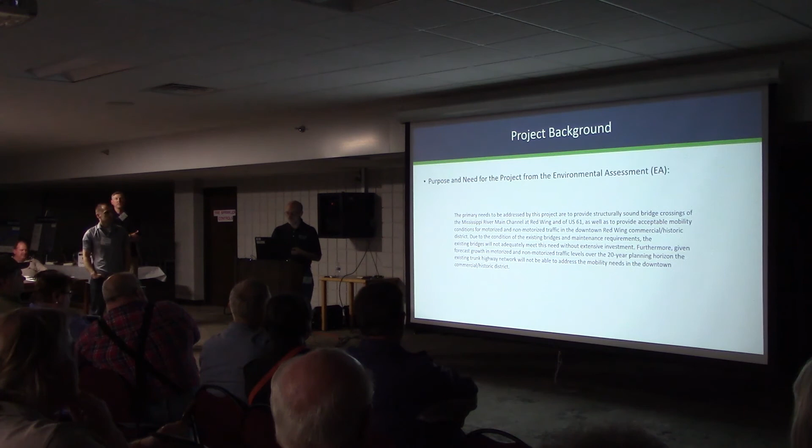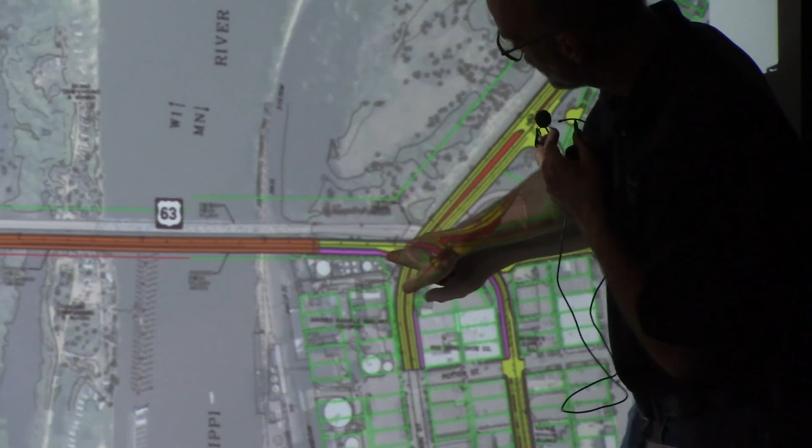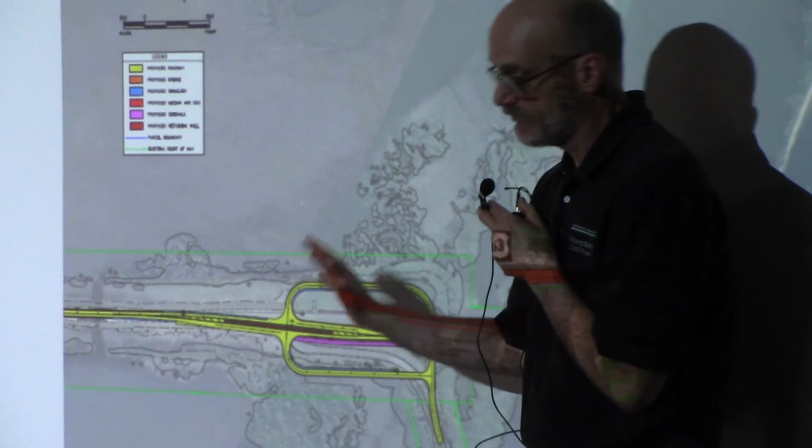Okay, then what happens as they get off the bridge in Wisconsin and need to be going on the opposite side of the road? So the follow-up question is, what happens when they get over into Wisconsin? So we're talking about, I'll call it purple, Viking purple - the shared use path goes across the upstream side of the bridge, comes to this intersection. Now what we want these bikers and peds to do, if they want to get across, there's a road there to get across, and there's a concrete median. There's no tall physical barrier prohibiting them from crossing, but there's a means for them if they want to get across to this side, or they can continue on their way.

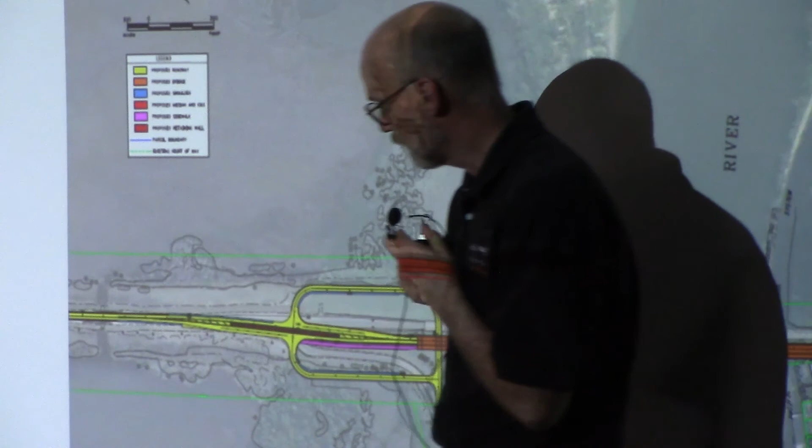Thanks. Yep. Anything else? Last call?

I wanted to go back to the lighting - that aesthetic lighting on the bridge that's visible from Levee Park was going to be cut out of the project because that's a complete city cost. The Jones Foundation and the Red Wing Area Fund stepped up and gave the city a donation of nearly $400,000 to install that on the bridge project. So just wanted to get that out there and let you know we had some local support, and we're really appreciative of that.

So is that just going to run along the bottom, or are those pillars going to have any lights on them as well? There's aesthetic lighting on the pillars as well, illuminating the lettering - the Wisconsin side will say Wisconsin, the Minnesota side Minnesota. So there's lighting in those pillars, and also some lighting in the overlooks at the pilasters, more pedestrian scale lighting so you can see the path along there. So we've got that aesthetic lighting as well.

Okay. Are they gonna put a thing - I asked that question last time - are they gonna put a deal marking Minnesota, Wisconsin, like two states at one time, right down the middle, one on the walkway or something? I think we could do something like that, couldn't we, Terry? On the border, the border wars, you know, fight these back, we got nowhere else to... just stay on your own side.